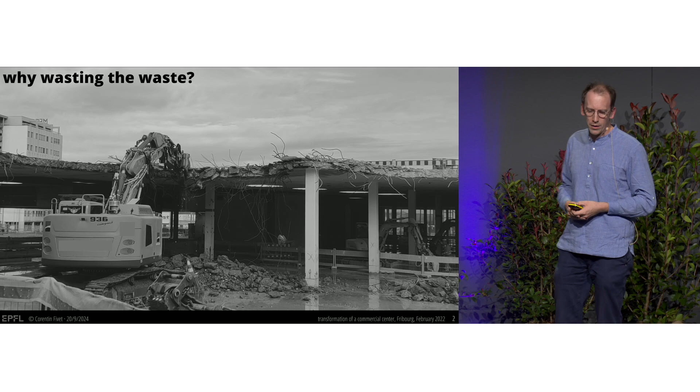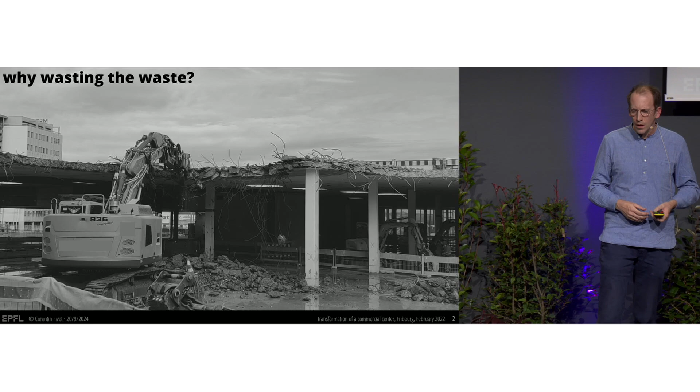We are not there yet because not replacing buildings, avoiding real estate investment, avoiding construction activities is a huge challenge. It requires changing the entire economic systems of the country, but it doesn't mean that we cannot do anything in the meantime. And something that we can do is find a way to replace, to upgrade the current building stock without needing natural resources, so while avoiding natural resources.

One way to do it, the one that I will explain here, is related to giving new value to the waste that is actually produced by construction activities. Currently, concrete waste is the most abundant waste in Switzerland.

What is the end of life for this type of waste? Most of it is landfilled, and another part is further crushed down, which requires new energy, and reused as recycled aggregates in what we call recycled concrete. Yet, to produce recycled concrete, we need new inputs of water, sand, and cement, so still need for natural resources, still production of waste, and still generation of a huge amount of CO2 emissions. So this is not very sufficient, and this is happening everywhere.

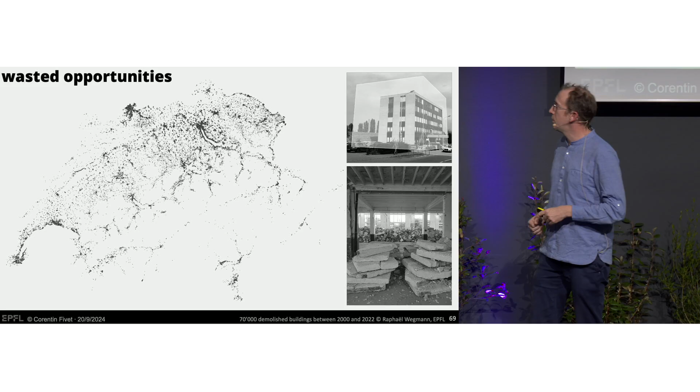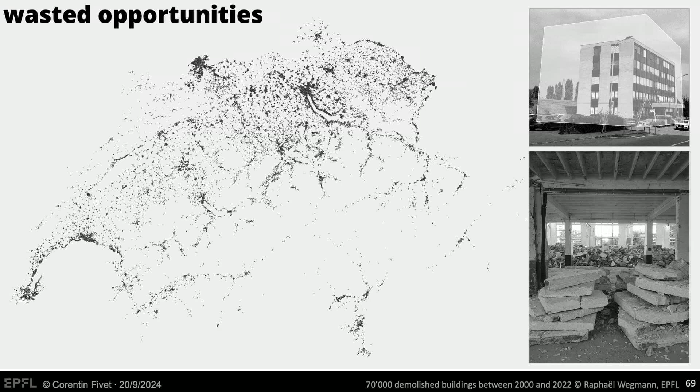So it's a resource that is available. It's an abundant resource, but it's a resource that is untapped at the moment. This map of Switzerland shows the 70,000 buildings that have been demolished in Switzerland from 2000 to 2022. So we are demolishing everywhere, and we have this resource available.

What can we do with this waste? Well, we can do something similar to what was done here in the Netherlands in 1986, where the top floor stories of the buildings have been carefully dismantled, so the concrete panels and slabs have been cut, stored, and then reused a few streets away in order to build the building on the right-hand side.

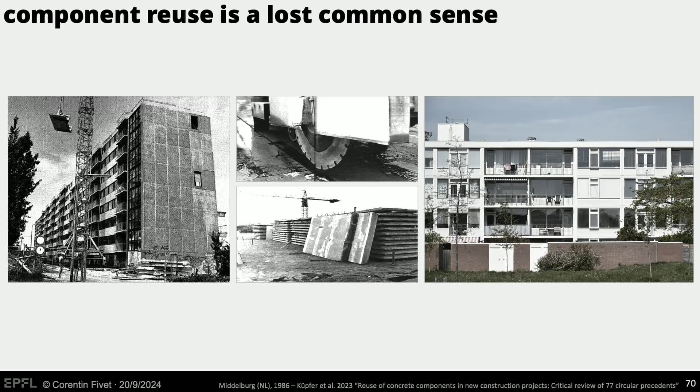The building on the right-hand side is of perfect quality. I mean, it fulfills all standards of construction. It's just as good, as performant as regular concrete, yet it avoided the use of natural resources, it decreases the generation of waste, and drastically reduced CO2 emissions.

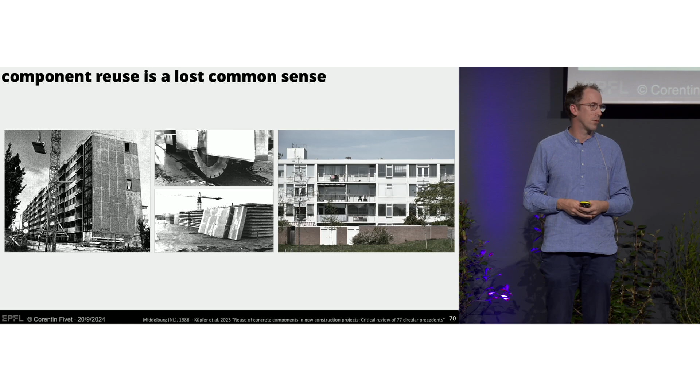This is one of the very few examples of concrete reuse, and the real question is, why is it still a niche activity? Why isn't it more common? Probably the main reason is related to something that was actually discussed here at the roundtable: the fact that change is very difficult to do, and in particular for component reuse, there are a series of new unknowns that are there, and we fear the unknown. We are humans. We fear the unknown.

Will we be able to procure the material? Will we have enough materials on time? What will be the quality of that waste? Will it be of sufficient quality or not? What are the new financial risks, and so on?

So these are new questions, and because we are not used to that activity, it's very hard to embrace them. And the issue is not that it's a risk. The issue is that it's a new type of risk. In the construction industry, the stakeholders take risk every day. It's very common to take risks, but it's okay because we take the same risk over and over for decades. We take the same risk, and so we are confident in taking the risk. As soon as you want to address new types of risk, there are barriers, and you have to address them. And so the issue is that we need to build trust in this new type of activity.

You put a value on this piece of paper just because you trust that in the near future you will be able to exchange it for another product. But no one guarantees that exchange, that value exists. It's only trust, because you were able to use that banknote yesterday and 10 years ago, so we trust that in the future we'll be able to do that.

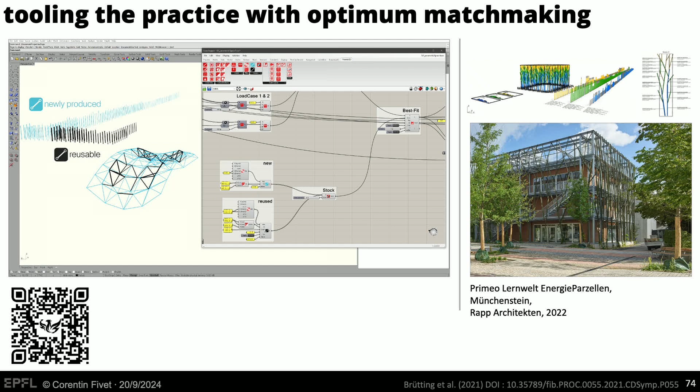One of the first things we did was develop tools for engineers and architects to optimize the matchmaking between a stock of components ready to be reused and a new project. How can we make sure products are placed at the right locations, that we're not using too much resources, that we're actually reducing CO2 emissions or not?

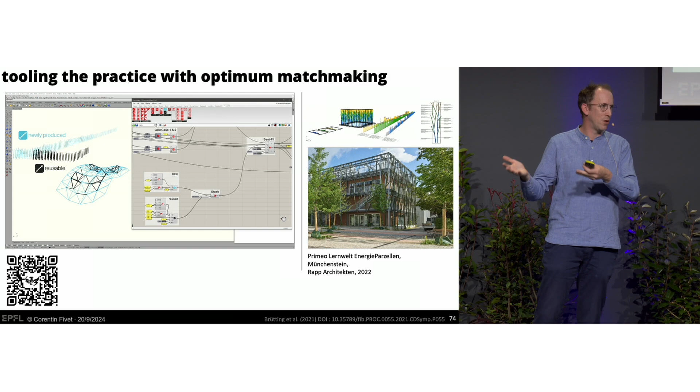It has been implemented in this building, but it's not because a tool exists that people will use it. Here I want to emphasize the importance of precedents. We need precedents, the industry needs precedents, to build this trust.

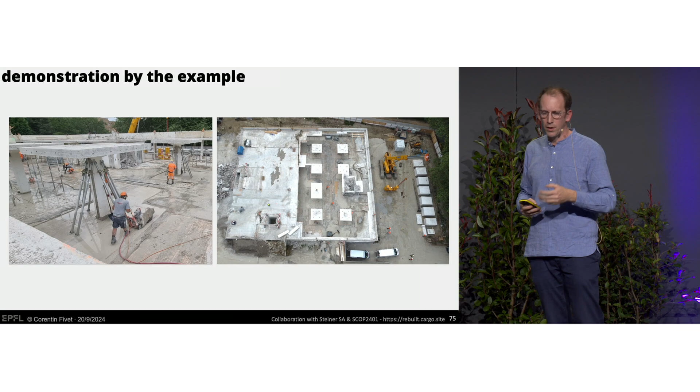We had the chance to collaborate with students at EPFL, but also with local companies here in Lausanne, to show that this building in Renens didn't have to be demolished fully. There is an alternative consisting in cutting carefully the components, realizing that there is embedded technology of value in that concrete, worth being reused.

And it's been reused in this pavilion built here at Écublens. This is a project led, managed, and constructed by EPFL students. They actually have a booth here in the hall, so if you have questions, you can ask them.

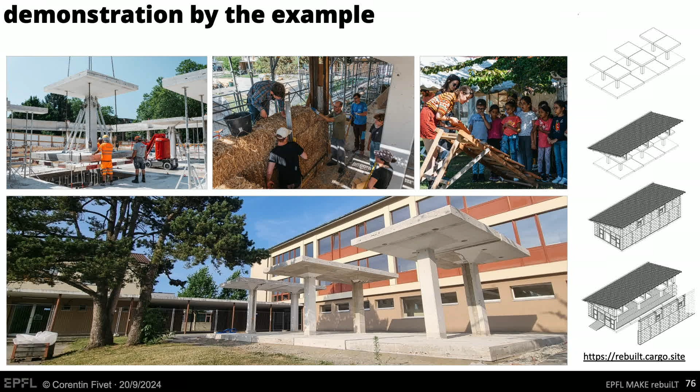Showing that low-tech, we can still build new buildings employing only or mainly low-tech activities. Yet, these are nice pictures, but there is a need for engineering, for development behind it.

There is a need for new connection systems. There is a need to assess the quality of this waste - what tools can we develop to make sure this is of sufficient quality? There is a need to understand how construction practice happened 50 years ago, so historical studies on construction activities. There is a need to understand how the change of structural system can work, ensuring reuse of these old slabs while ensuring current construction norms are fully fulfilled.

But there's nothing new here. The point is really to show engineers that all the knowledge they've learned as students is actually useful for new types of applications. This is also a way of implementing innovation from the bottom up, showing that changes may happen quickly.

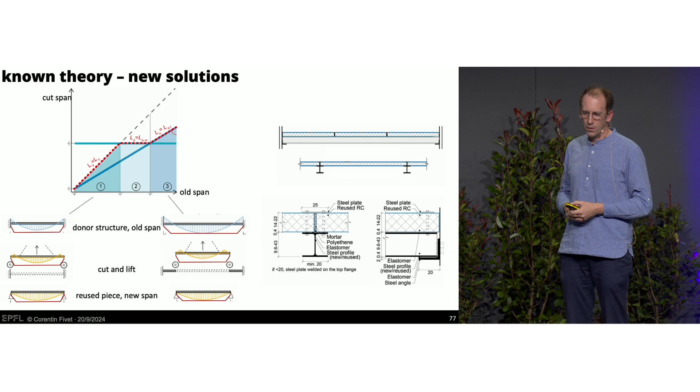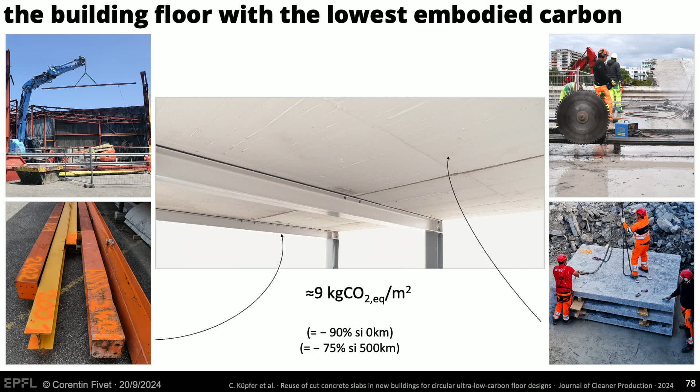And of course, if you do this reuse, you avoid waste, you avoid the use of natural resources, but you're also decreasing CO2 emissions drastically. Most of the embodied carbon in Switzerland, in developed countries, is related to the construction industry, and most of the embodied carbon in buildings is related to the production of slabs.

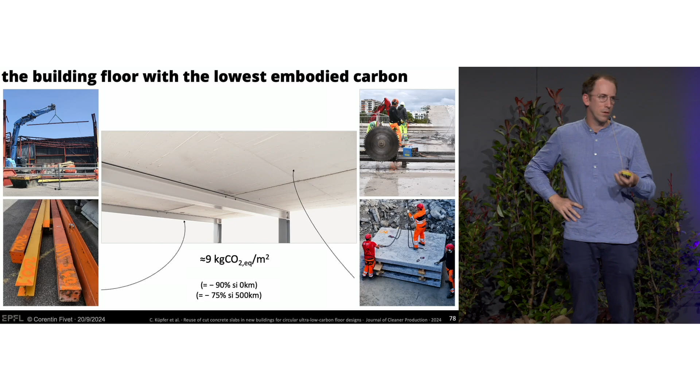So if you can decrease that, you really have an impact. Just reusing this old steel, this old slab, allows you to decrease CO2 and greenhouse gas emissions related to the construction of that slab by 90%. And if you have to transport these concrete pieces from the other side of Switzerland, you can still achieve a 75% reduction.

So this morning, Amina Saheb presented this opposition between sufficiency and efficiency. Sufficiency is doing the right things, efficiency is doing the things right. Here is an example showing that it also makes sense to do the right things right.

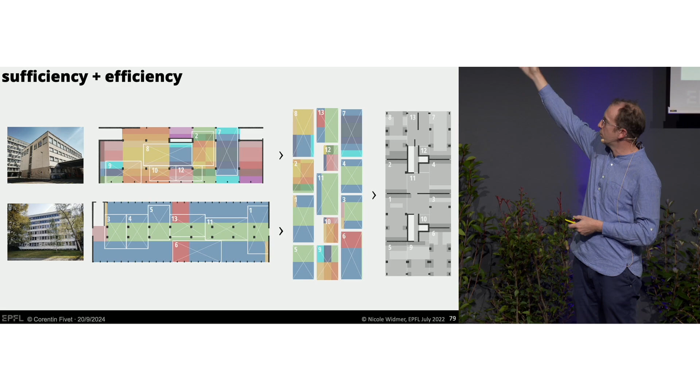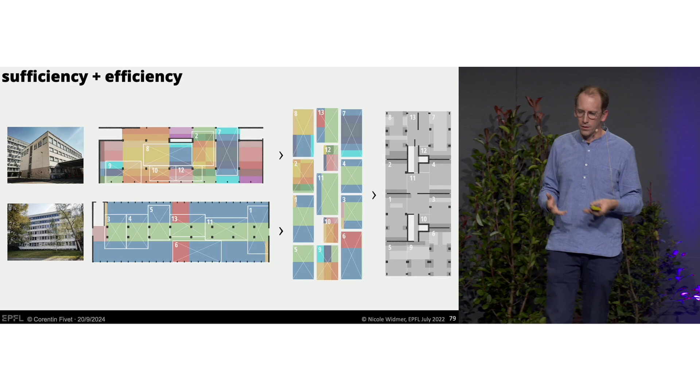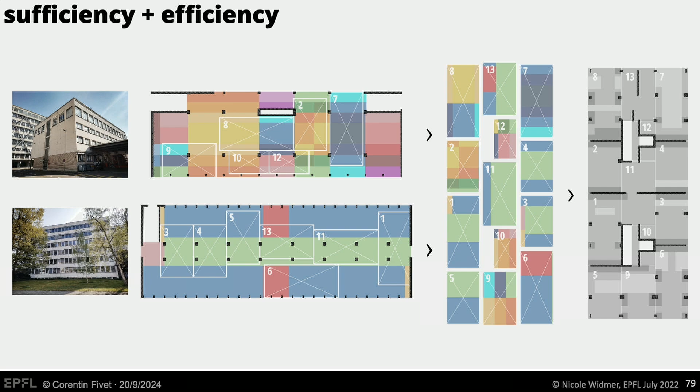This is the result of a master thesis by a student. She started with inputs: two buildings that were about to be demolished in Basel, and a floor plan of a new building to be constructed on the same location. Every color means a different reinforcement bar in the slab, so different stiffness and strength. It's like a puzzle you have to optimize—how can you cut pieces from the existing buildings, reassemble them, rotate them, to make sure the new building can be constructed, minimizing the need for strengthening the old material while keeping the new building safe. So achieving both low-tech, sufficient design and high-tech, efficient optimization.

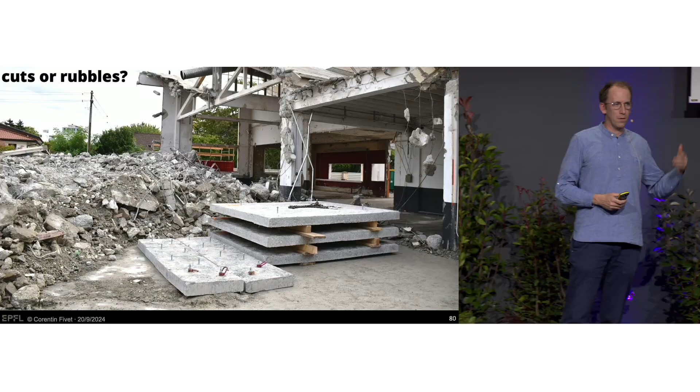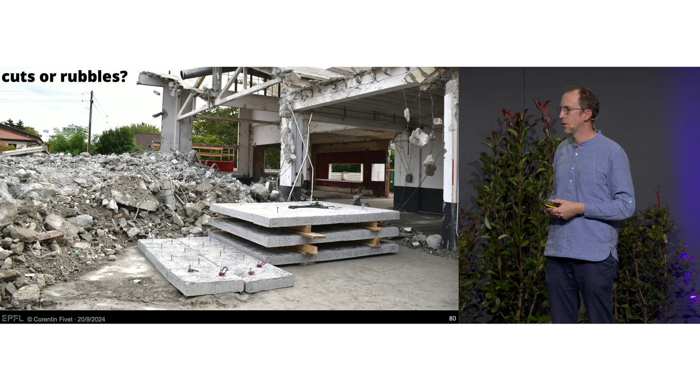From an economical point of view, it makes sense to cut the slabs, but it doesn't make sense to cut everything in the building that has to be replaced. So we still have these aggregates, this rubble that is available. We are exploring ways of easing the reuse of this rubble by implementing digital improvement at key locations. The point is not to fully digitalize the whole process—it would take a lot of time, and we don't have that time. Sustainability has to be achieved today. Actually, it had to be achieved 50 years ago, so we are already late.

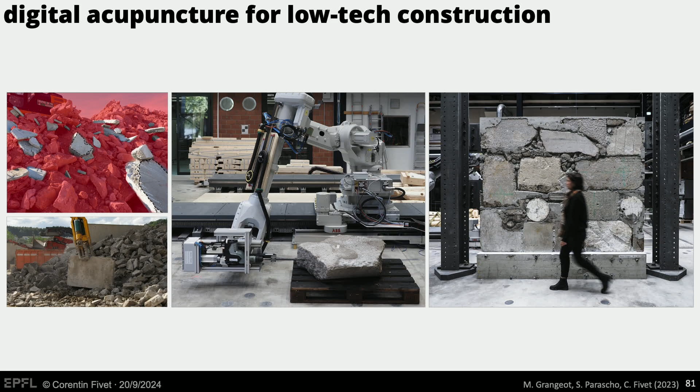So we need low-tech construction, but at the same time we have high-tech solutions available. The question is where to apply key digital improvements—for instance visual recognition, machine learning, some automation—but not all of it, while allowing the reuse of this waste and putting the workers at the center of the process. Because changes have to happen now, and this has to be quickly implemented. So we don't see an opposition between high-tech and low-tech. We rather see the need for using high-tech in a pragmatic way in order to improve and expand the use of low-tech innovation.